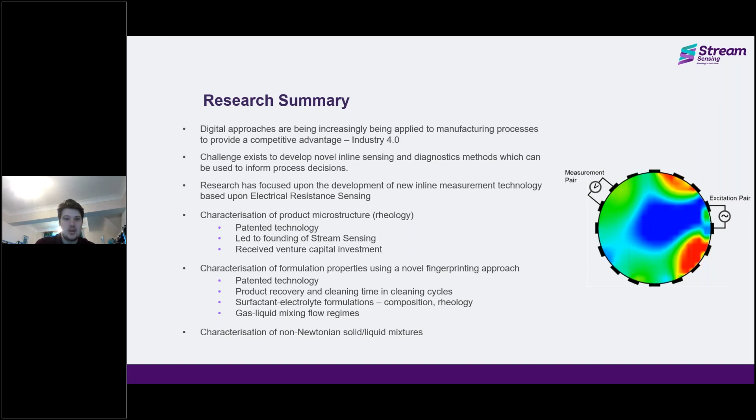Also developed a novel fingerprinting methodology to fingerprint different formulations. That's also patented, and that's been applied in a number of operations. So been looking at the product recovery and cleaning time and cleaning cycles, different compositions and rheology of surfactant electrolyte formulations, and gas liquid mixing flow regimes. Also looking at the characterization of non-Newtonian solid liquid mixtures in non-nuclear densitometry. For the sake of brevity, I'm going to focus on one application, so looking at rheology.

Rheology impacts every aspect of our daily lives, from the texture of the food to making sure that when you brush your teeth, you don't end up with toothpaste on your shoes. It's also critical in chemical and physical processes, governing your process efficiency and also the final product quality. Typically you would take a sample of your product at the end of a process, take it to the lab, analyze it, and then if it doesn't meet the quality control standards, potentially a batch would have to be scrapped or completely reworked. This obviously creates large volumes of waste and large amounts of energy consumption.

Using an inline approach and measuring the rheology in a pipe overcomes this, and it has a number of other advantages. It allows you to unlock production capacity, as it's a basis for real-time product release, improve quality control responsiveness, and also help enhance process design and understanding.

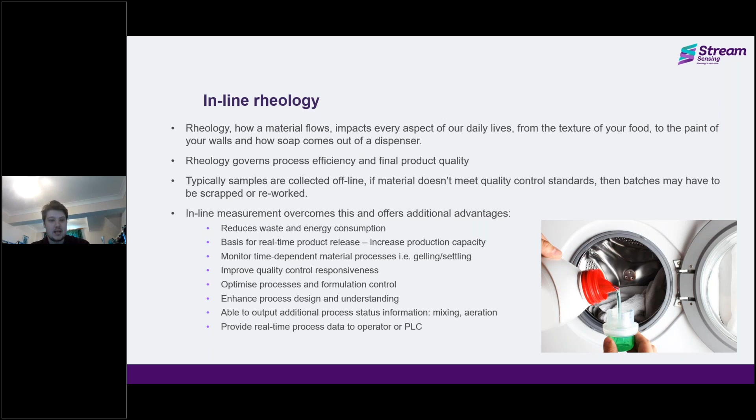So the technology which a lot of my work is based on is called electrical resistance sensing, or it can be tomography. Essentially the best way to think of that is it is a CT scan, but rather than using X-rays, you're using an electric field.

And we measure the rheology by tracing the motion of the fluid across multiple planes of imaging. So obviously we know the electrodes are fixed. We know how long it takes to get from one plane to the other. So then we can start to extract the laminar velocity profile.

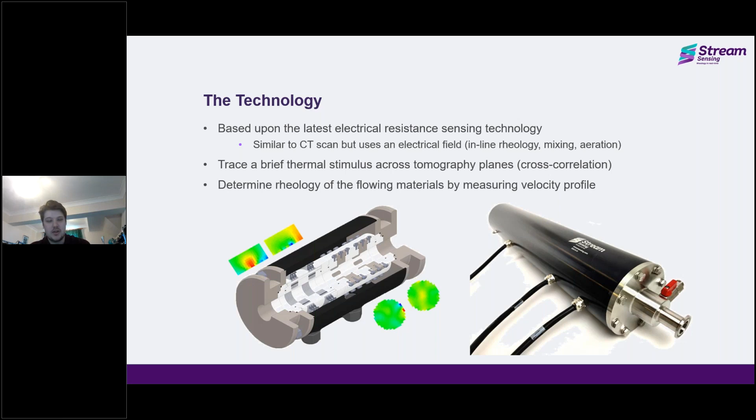And with this technology, we couple the velocity profile with the differential pressure measurement, and that can be used to extract viscosity at key quality control set points, and also output conventional rheometry plots such as shear stress, shear rate, which you get from a rheometer. As I mentioned before, you can also get mixing behavior at the same time, which makes it a powerful characterization tool.

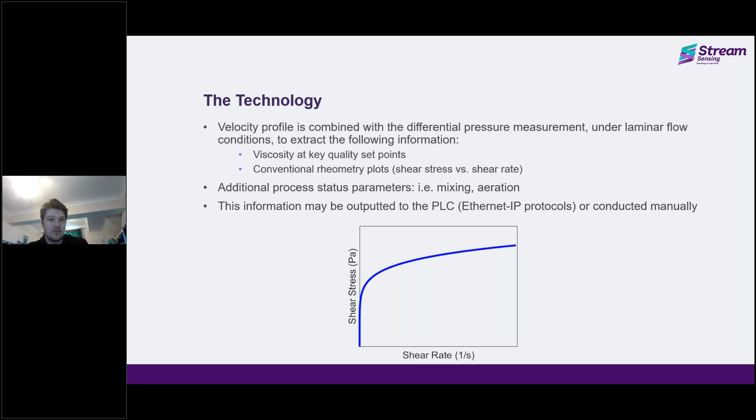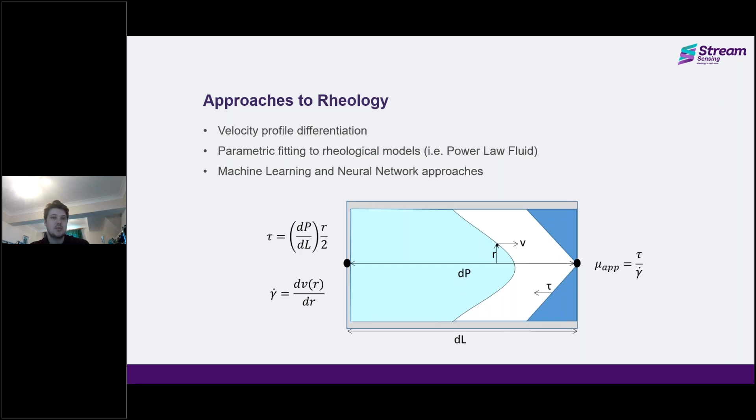So once you've got the velocity profile and the differential pressure measurement, there's a number of approaches we can take to get the rheology. We can differentiate the velocity profile. A favorite approach is a parametric fit into rheological models, so say a power law fluid. But often industrial fluids are a lot more complex than that. So you have one velocity profile trying to fit to say 5-6 parameters, and that makes it slightly ill-conditioned. So there's also another approach which we developed using machine learning and neural network approaches to extract rheology.

So how does the system perform? So the first thing we did was validate the velocity profiles we get from the technology, and this was done using particle image velocimetry, which is a laser-based technique which is of high resolution. However, obviously, if you're using lasers, it's not ideal in an industrial setting, and it's limited to transparent fluids. But what it was able to do is provide us confidence that the velocity profiles which we're measuring were accurate, as we got a high correlation coefficient of 0.99.

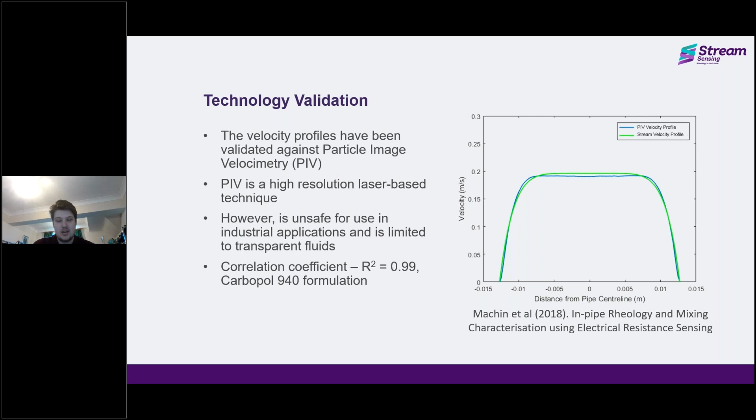I guess the ultimate test is to validate the technology against an offline rheometer. So within a flow loop, we had a 1-inch flow loop and a 1-inch sensor. And basically, we picked fluids such as glycerol, xanthan gum, carbopol, which have a limited time shear dependency. So if you're taking a measurement in a pipe, it should be relatively similar to what you're taking offline. And this was used to validate the technology against a rheometer. And what we found is the approach that I developed was able to accurately monitor inline rheology with an accuracy of 98%, which is really positive.

This is just a separate experiment to show how the two can be linked. This was done in a similar flow loop, but it was recirculating. This was started off with a very low concentration xanthan gum solution. To that, we added a really high concentration of xanthan gum, so it was mixing over a period of time. And what we were able to monitor was the evolution of rheology over time by the rheology measurements, and also measure the distribution of the electrical properties within the sensor, so we can start to see when the process is mixed and when the process isn't mixed. So you can do things like coefficient of variance measurements at the same time. So it then becomes a really powerful characterization tool.

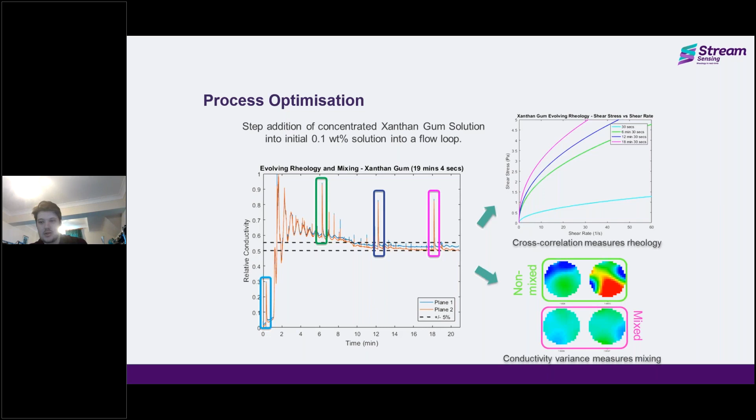So this was another approach we used. The aim of this was to replicate a quality control process for rheology. This was done at a manufacturer of home and personal care products using industrial fluids. People tend to measure viscosity at key control set points. So we picked a viscosity at a certain shear rate, and then looked to see if we were able to match this using our system. And what we were able to do was gain an accuracy of plus or minus 5%, which is great. And then this can be used for unlocking process capacity, optimizing batch time release, and also automating quality control principles.

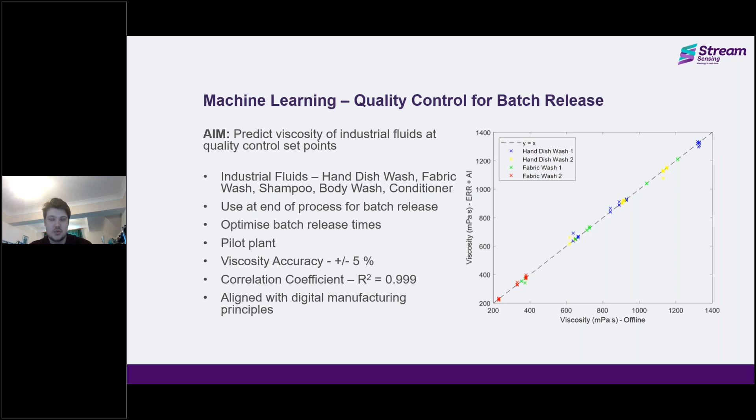So just a brief summary of my work. I developed new inline sensing and diagnostic tools to characterize complex industrial fluids, focused on inline rheology, which obviously has a number of measurement advantages, which I talked about. I also developed two more techniques, which I haven't had a chance to really touch on, looking at fingerprinting of fluids and characterizing non-Newtonian fluids, and non-nuclear density measurements. So if anyone wants to talk to me about that after, it'd be great.

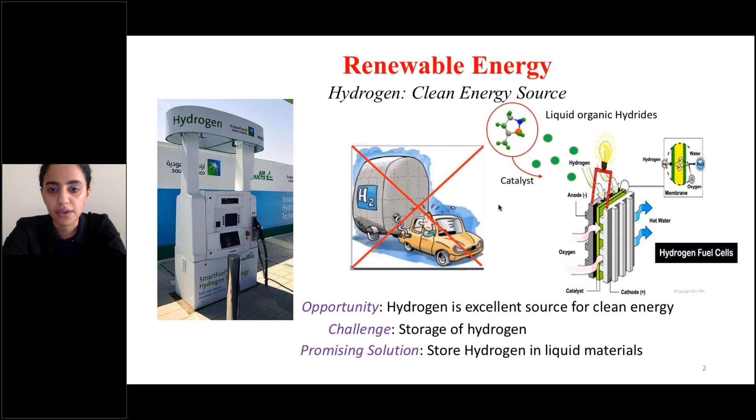As we all know, hydrogen can be an excellent source to produce energy. However, the storage of hydrogen is problematic. So the promising solution here is to store it in the bonds of methyl cycloalkanes and cycloalkanes. However, this reaction is endothermic and requires a catalyst. The best catalyst for this reaction is platinum. It's quite expensive, but it's the best to lead to the main reaction that produces hydrogen and prevent the side reaction that leads to the cracking of the carbon-carbon bond.

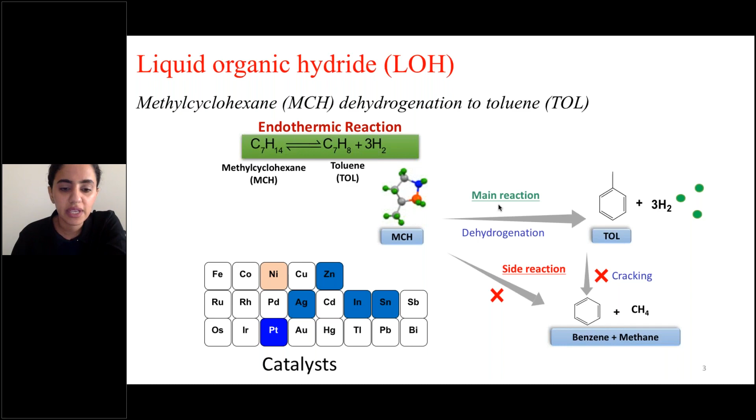Looking into different elements that can replace platinum, nickel has emerged as a potential replacement, along with other elements, and also metal alloys in the form of nickel-zinc. So our contribution to this was to look into the intrinsic difference between platinum and nickel in the full dehydrogenation cycle when methyl cyclohexane, for example, is converted into toluene.

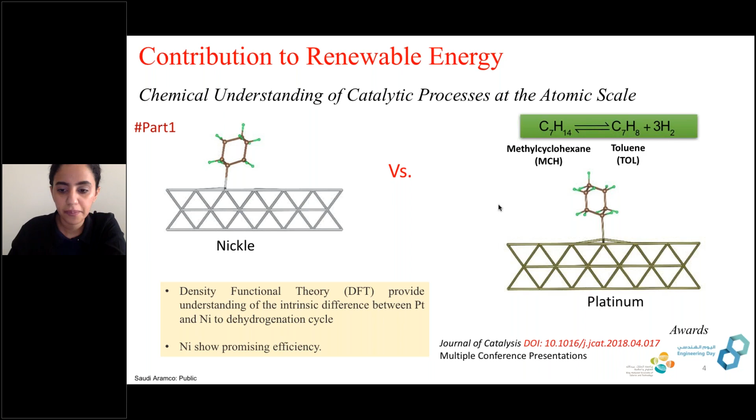We looked into the cracking of the carbon-hydrogen bond over those metallic surfaces, flat surfaces actually, (100), using DFT calculations. We provided different insights into the full thermodynamic cycles and the energy required for each step. And we saw that nickel provides promising efficiency for this process with a certain degree of energy efficiency. We also looked into the chemical insights that could take place at those flat surfaces.

In particular, if we look into the methyl substituent in methyl cyclohexane, we can see that the cracking of the carbon-hydrogen bond from the methyl group is an exothermic process that leads to the stability of this species and leads to the sticking of the parent molecule onto the surface, and enhanced stability due to the chemical changes that take place at the methyl substituent, leading to the transformation from sp3 hybridization into sp2 hybridization, which provides extra stability to the parent molecule at the interface.

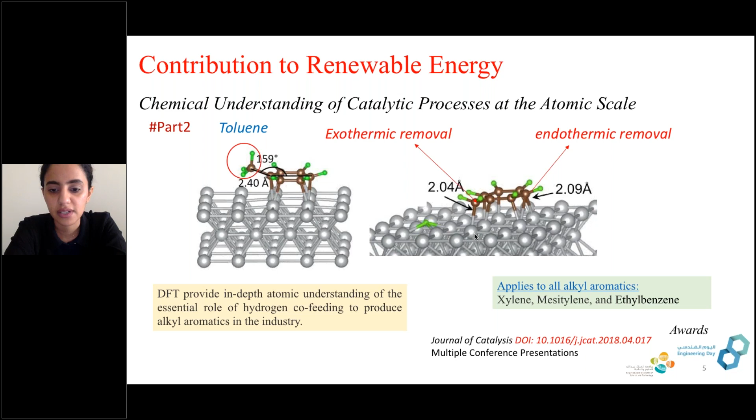We saw that this can be extended to parent molecules with different alkyl substituents, as well as long branches of alkyl substituents such as xylene, mesitylene and ethyl benzene. And this actually provides in-depth atomic understanding of the essential role of hydrogen co-feeding to produce alkyl aromatics in industrial applications.

The second part of my research, which took place during my work in Saudi Aramco, is in the area of enhanced oil recovery. In this area, we looked into the opportunity of smart water flooding to enhance oil recovery in tertiary processes. It's more or less better than other enhanced oil recovery processes like chemical or thermal processes. It's less energy intensive and has less environmental impact.

It requires changing the chemical composition of the water, either by reducing the salinity, altering the concentration of divalent cations, or increasing the concentration of different anions. However, this process is not quite understood in terms of the mechanisms that lead to its success, and further fundamental understanding is required, especially at the atomic scale and the nano and micro scale.

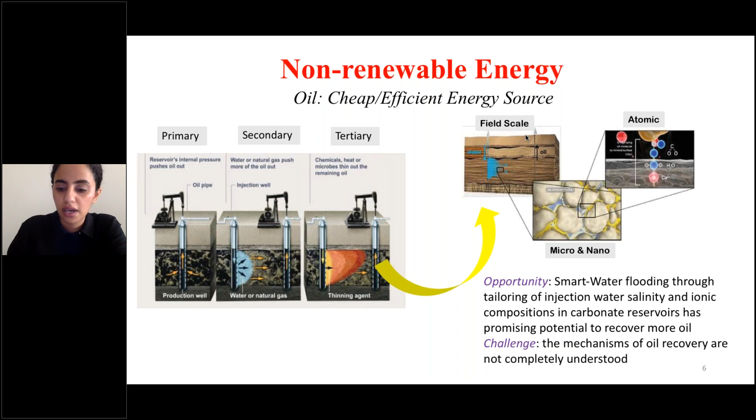So our contribution in this was the understanding of the physicochemical interactions that take place at the interfaces of this very complex system of oil, water, and rock surfaces, especially carbonates, since most of the reservoirs in Saudi are carbonates.

So we looked into the electrokinetic interactions that take place at the oil-brine interface as well as the calcite-brine interface. We found that the electrical potential at those two interfaces differs drastically when you change the composition of the water, either when you reduce it, as in the case of smart water, or when you choose certain ions like sodium sulfate water. We found that at the calcite-water interface, the potential reduces in the case of smart water, which is very promising in our case.

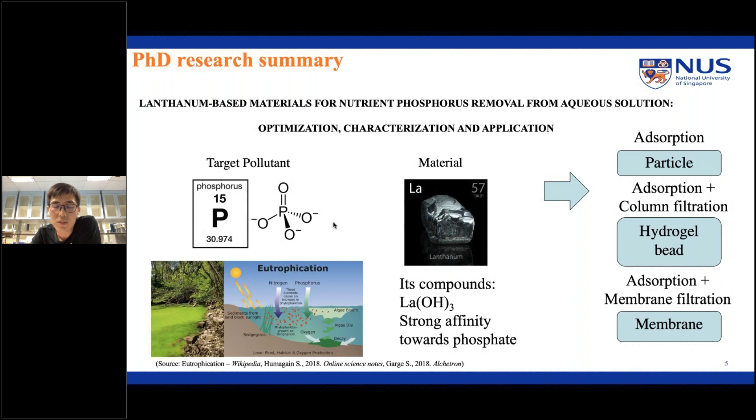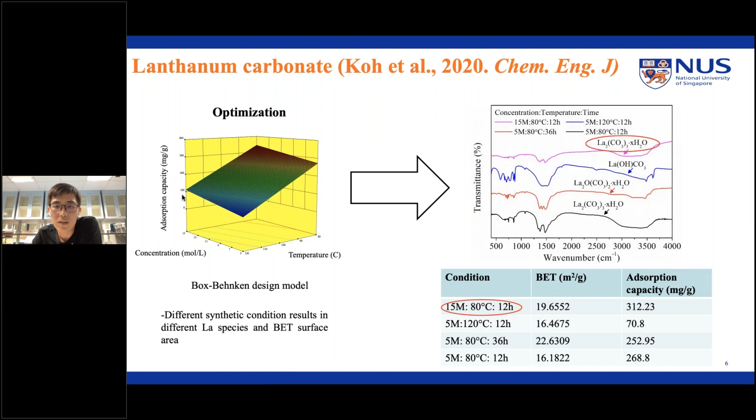So this is the first part of my PhD research, using lanthanum carbonate particles. Firstly, the particle was optimized using a Box-Behnken design model in order to obtain the best conditions for the synthesis of lanthanum carbonate with the highest adsorption capacity. We can see that a higher concentration of urea, lower temperature and time result in the highest adsorption capacity.

As shown, this material has good performance for phosphate removal across the pH range, and it shows consistent performance even in complex wastewater. Other than that, it can also be regenerated and reused for subsequent adsorption processes.

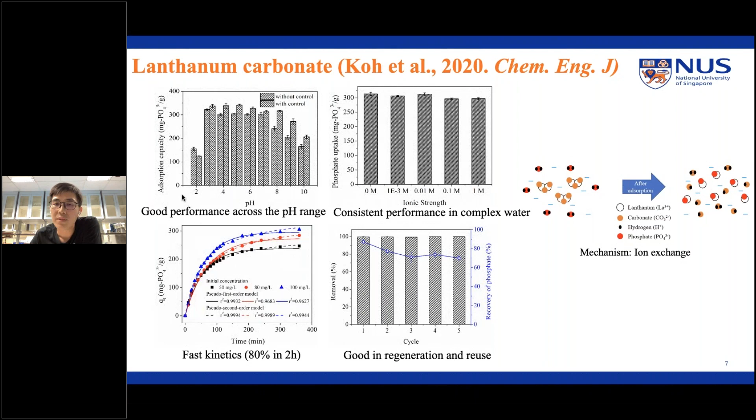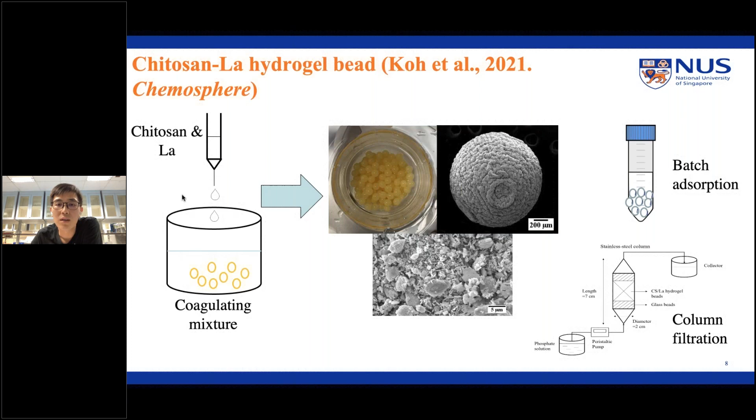So the next step is to incorporate lanthanum into chitosan hydrogel beads. By doing that, we are able to recollect the hydrogel beads easily from the water for subsequent reuse. The hydrogel beads were optimized by varying the La concentration and the cross-linker degree. It shows that the optimized hydrogel beads with smaller size can achieve better kinetics, comparable to the particles in the previous stage. Other than that, because it has been formed into a bead shape, it can be used in a column filtration process.

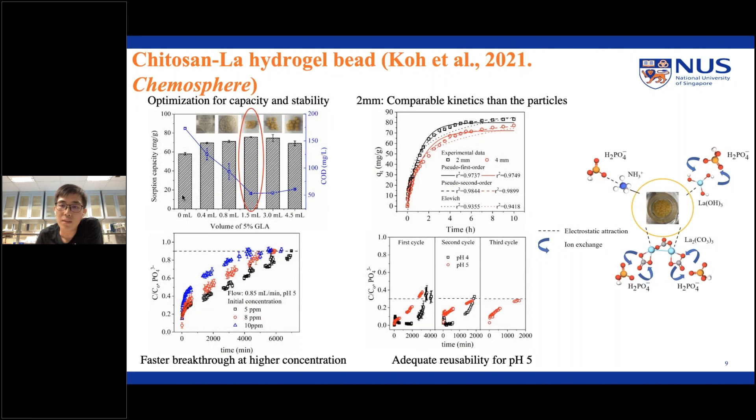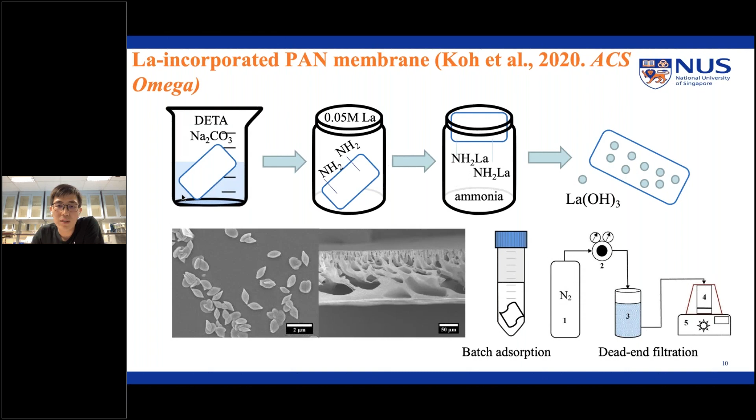So next is incorporating the La into a PAN membrane. By doing this, it's also to achieve the similar purpose, to make the recollection process easier, and also this membrane can be applied in the dead-end filtration process. It shows that the incorporation of lanthanum reduced the porosity and the pure water flux. We can see that in the filtration process, it can remove the phosphate pretty well, and it can be reused and also used in the reservoir water.

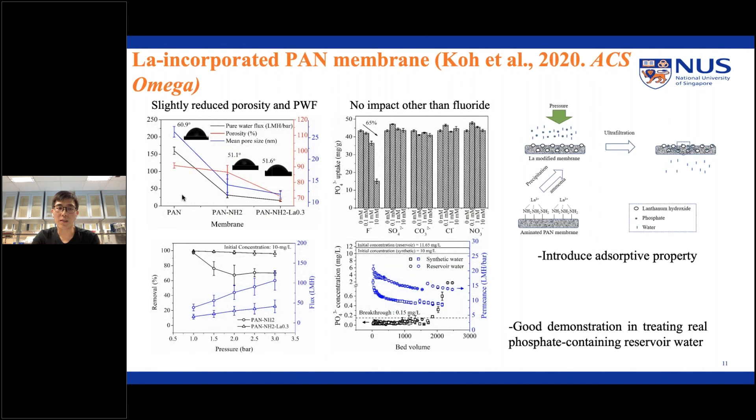By introducing the La into the membrane, it introduced the adsorptive properties, and at the same time, you are able to remove other pollutants such as organic components. Next, I optimized the incorporation methods for incorporating La into the PES membrane. By doing the comparison, we are able to obtain the best method for the incorporation of La.

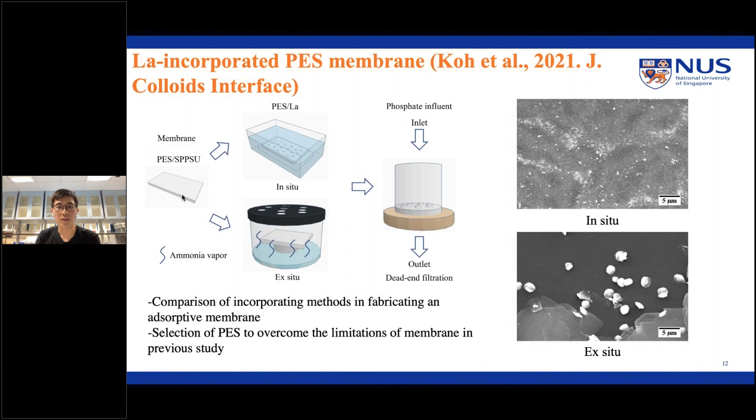We see that the different methods resulted in different La species on the membrane. Overall, by studying their performance, we can say that the in situ method resulted in a membrane with better performance in both batch adsorption and membrane filtration process. Other than that, this membrane is able to show comparable phosphate removal when we compare it with the nanofiltration membrane.

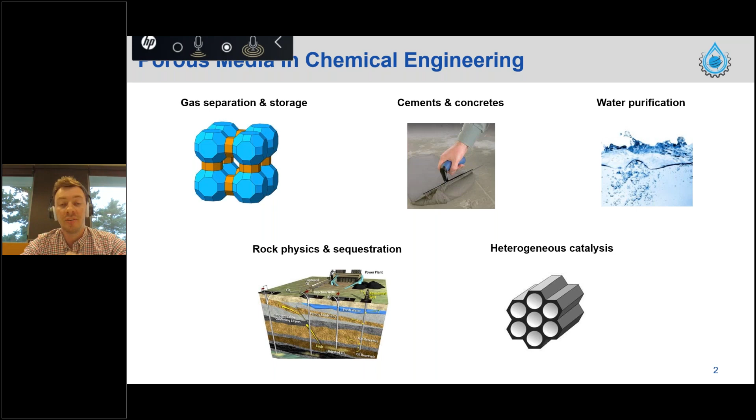A non-exhaustive list of porous materials for these sorts of applications is provided here and ranges from bespoke, well-characterized and well-defined systems such as zeolites for gas separation and storage, and porous systems for heterogeneous catalysis, across to more heterogeneous systems, including cements and concretes, and also naturally forming systems that we might be interested in for geosequestration.

The primary workhorse of my research is magnetic resonance, and I don't want to go into a huge amount of theory, but by magnetic resonance, I mean nuclear magnetic resonance, typically abbreviated to NMR. NMR leverages the inherent magnetism of many atomic nuclei and the fact that we can use the application of magnetic fields and radio frequency pulses to control that magnetism in order to generate some sort of signal.

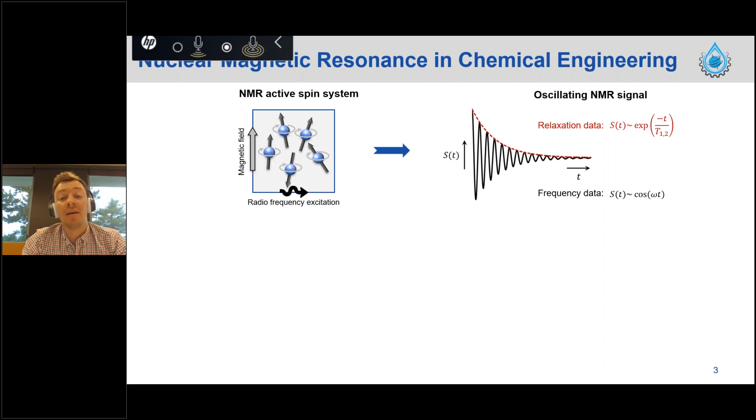The signal that we typically get out of an NMR experiment is an oscillating signal. An example is shown here, and you can see it oscillates and decays in time. This signal form characterizes the system under investigation quite well. In a chemistry or biochemistry research lab, the interpretation of this kind of data is typically done by looking at the frequency data, using Fourier transformation to take this data into a frequency spectrum.

It's well known that the frequency behavior of NMR data is sensitive to the electronic environment of the molecules or the solids that you are analyzing, so it's a very well-established probe of molecular structure. In the case of understanding fluid behavior, and by fluid I mean gas or liquid or a combination, in porous materials, however, this process is usually not quite as useful.

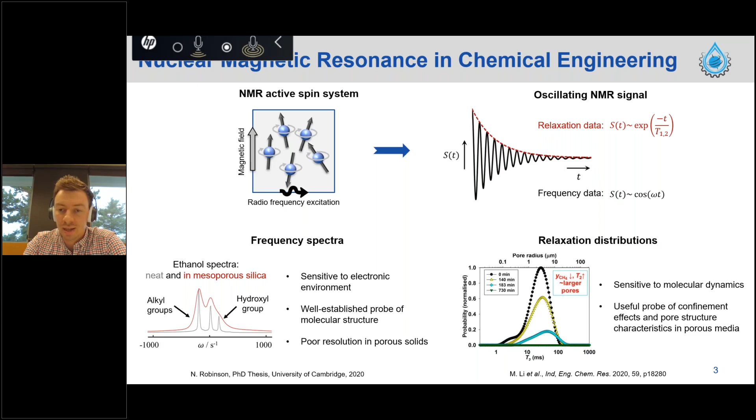So while frequency data is sensitive to structure, relaxation is sensitive to dynamics. And this is a particularly useful probe of porous materials and of fluid behavior within porous materials. And it's this behavior that I leverage in my research. So there's an awful lot of relaxation theory, which I won't go into at all today.

I think this is a really fascinating bit of chemical engineering science. What I'm going to show you today is just a quick example of using relaxation data to look at both of those phenomena. So how can we use relaxation data to test out essentially material structure, and then how can we also look at interfacial processes?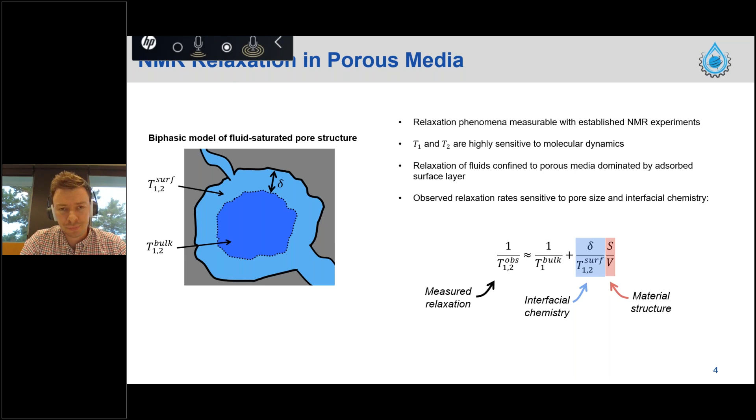Because they use permanent magnets rather than cryogenic liquids, there's no cryogens to deal with, so you don't have the safety or cost concerns of constantly replenishing liquid nitrogen and liquid helium, which are present within the superconducting system. And so that has, as I said, a large reduction in cost and safety. It also means that these low field benchtop systems are pretty much maintenance free.

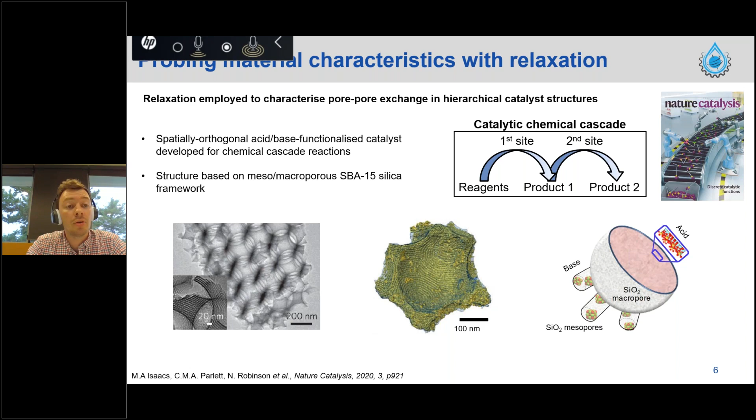So this material is based on templated mesoporous silica, but it also has integrated macropores, and the macropores and mesopores will functionalize differently so that one pore size will catalyze the first reaction and one pore size will catalyze the second reaction. Critical to the validation of this material, however, was knowledge of the route which fluids take from the external bulk into the material. Do they go bulk, macropore, mesopore, or do they go bulk, mesopore, macropore? And so last year I utilized magnetic resonance in the form of quite a complex 2D correlation set of experiments to actually probe this. So this is actually the only known experimental route to this behavior.

And so by varying the mixing time, we were able to probe diffusive exchange throughout this structure across a variety of length scales. And we were able to show that there was clear connectivity between the mesopores and the macropores. And more importantly, we were able to show that there was clearly a well-defined diffusive pathway that went from the bulk to the macropores to the mesopores. And so this knowledge informed the location upon which the different active sites needed to be placed during material synthesis.

The second example I'm going to show you is to do with adsorption. So looking at the surface affinity of liquids within catalyst materials is critical in, for example, solvated green chemical processes, where you don't want your solvent to outcompete with your reagent for the surface. So the ability to rapidly and non-invasively characterize the surface affinities of liquids within different porous catalyst materials is critical.

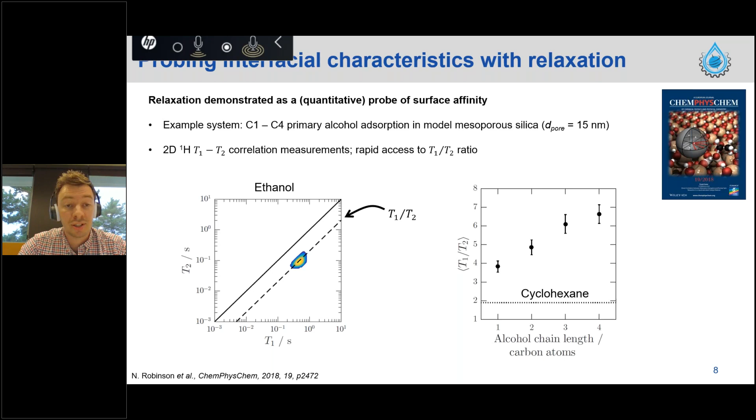And so in this work, we looked at a series of C1 to C4 primary alcohols, so methanol through to butanol, interacting with a model silica surface, and we recorded the T1/T2 ratios, also cyclohexane as a non-interacting reference. And then we compared that with adsorption modeling. So using periodic DFT, we calculated the adsorption energetics at the single molecular level, and then provided a direct comparison between the NMR acquired relaxation surface affinity data and the DFT molecular modeling acquired adsorption energetics.

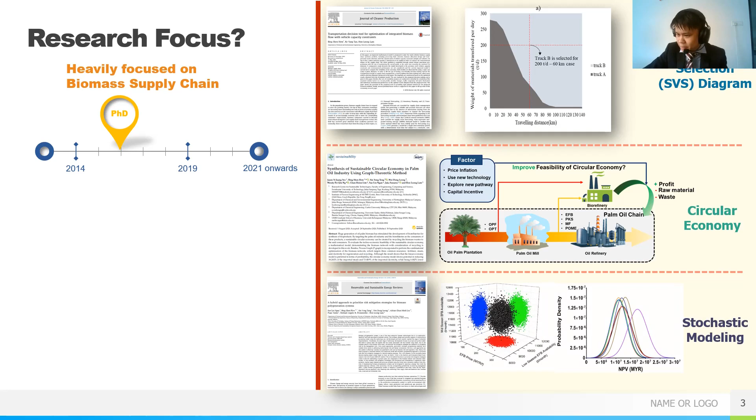Speaking of policy, among so many policies, which policies should be prioritized? My team attempts to answer this research question using Monte Carlo simulation, which considers various uncertainties such as biomass availability, biomass quality, and unit price of the material. Nevertheless, after I graduated, I started to explore more areas outside my comfort zone. I believe that all the skills I learned during my PhD studies are transferable to other fields of research. So why not expand my contribution to a wider area?

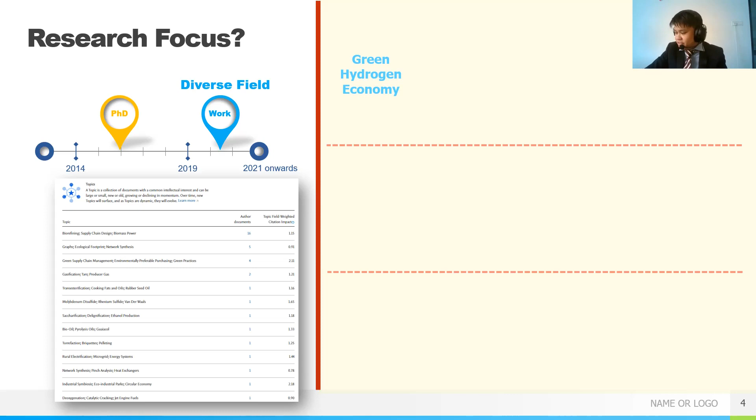The green hydrogen economy has been a hot topic in recent decades. I'm delighted to work with a research team at Kyung Hee University to study the optimal hydrogen production technology in Korea. Furthermore, in the Malaysian context, the biogas generated from palm oil mills serves as a feasible feedstock for hydrogen generation. To assess the feasibility of this pathway, I work with a research team from the University of Nottingham to determine the optimal pipeline design, which can be used to transfer biogas to the dedicated hydrogen production plant.

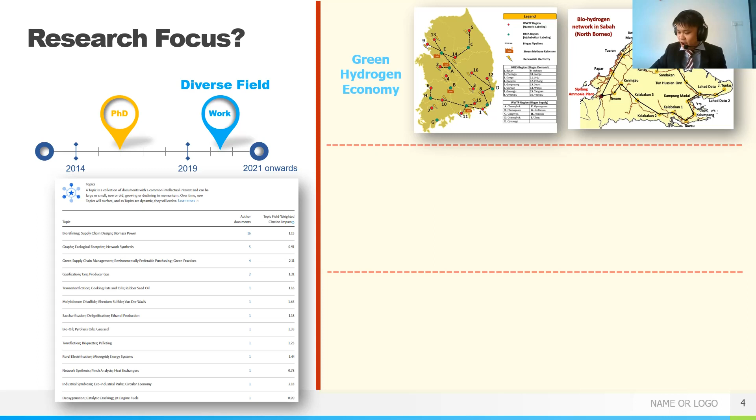Next, lean and green aspects are important indicators to be considered in process debottlenecking and upscaling. In one of my projects, my team developed a tool called BOTA to assist decision makers in prioritizing the upgrading sequence of process equipment. Just a side note, this also presents the impact of using different upgrading schemes. For example, if one decides to upgrade all equipment in one go, the payback period required may be longer than that of a progressive upgrading scheme.

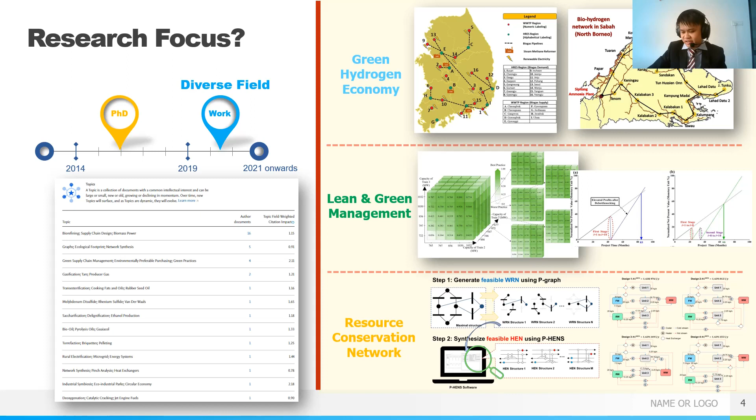More recently, I have started a few projects related to energy planning and resource conservation networks. One of them focuses on determining the heat-integrated water network, which aims to minimize both fresh water and energy requirements. We propose to solve the problem using P-graph since it is capable of yielding multiple near-optimal solutions simultaneously. With the identification of alternative solutions, decision makers can then perform a more in-depth comparison and select the one that is most suitable for their specific case. Transforming the findings into reality is always the most important mission for a researcher.

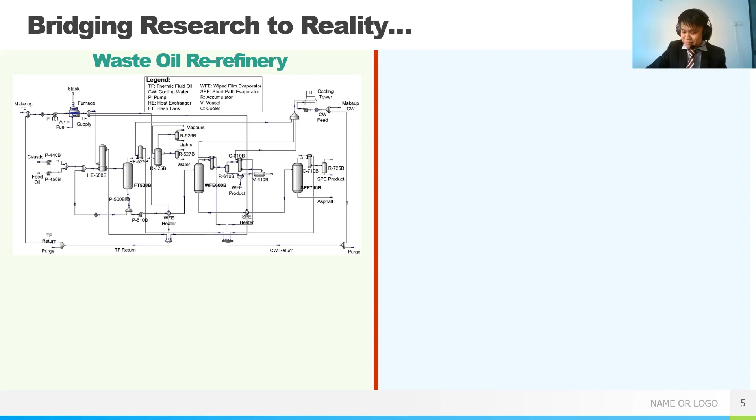Just for sharing, in one of my earlier projects, we were looking to optimize the performance of a real waste oil re-refinery plant in Malaysia. However, given that there is a gigantic amount of process variables to be considered in the plant, the optimization process can be very arduous when using the conventional method. To address this problem, the team came up with a novel optimization method called PASPO, which incorporates the use of PCA to effectively reduce the dimensionality of the problem while ensuring the reliability of the outcome.

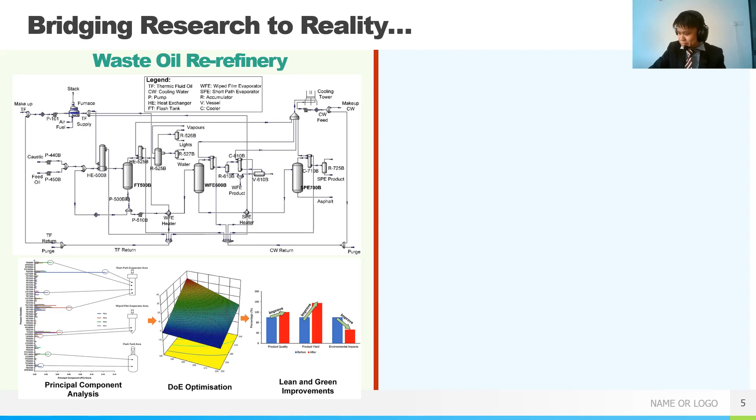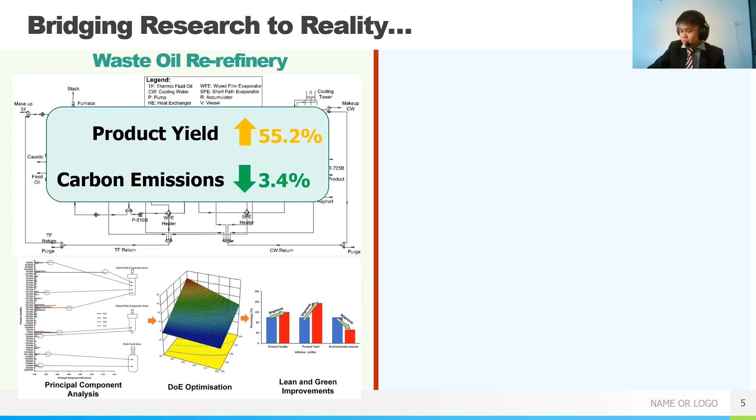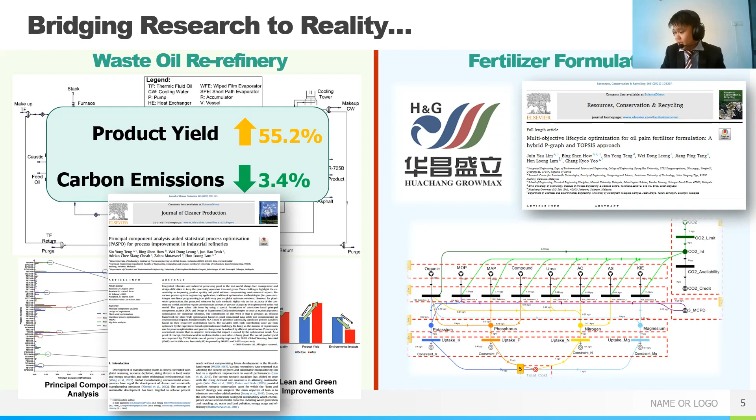Based on the pilot testing in the plant, after adopting the improved scheme suggested by the model, the product yield and the overall carbon emissions of the plant have been improved gradually as shown in the slides here. You can find out more in this paper if you are interested. During my industrial attachment in Huachang Growmax, I was asked to determine the optimal oil palm fertilizer formulation. Again, with the aid of the P-graph approach, I managed to come up with a few attractive fertilizer formulations for the company. All the findings have been documented in the journal article shown here.

Moving on to the grant application, I have secured grants from all three dimensions shown here. In terms of industrial collaboration, I've led a team in discovering the economic feasibility of building a green hydrogen plant in Kuching, Malaysia. The research served as an important guide for SEDC Energy in identifying the potential gaps prior to the actual deployment of the plant. Last year, we secured a state fund which aimed to foster research that supports green economy and sustainable development in the Sarawak state. In this project, we aim to convert the waste carbon dioxide, the cement waste, and the unwanted fly ash into usable green building material using the absorption and AWL technology.

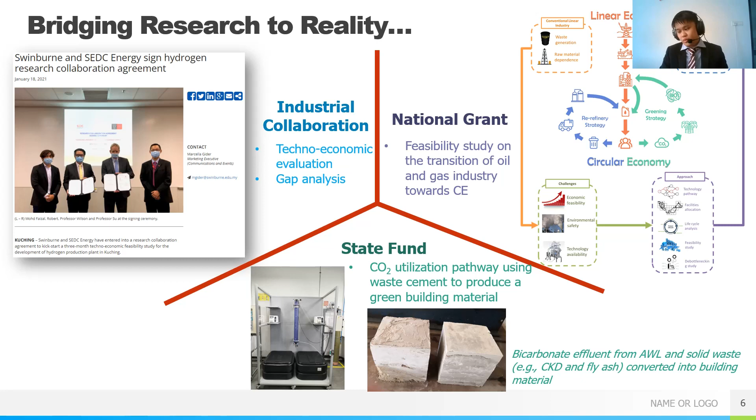Furthermore, my team also secured a few national grants. For example, one of them aimed to explore the feasibility of transitioning the conventional oil and gas industry into a circular business model. Generally, we consider two main strategies. The first focuses on the re-refining option for the waste oil, while the latter focuses on replacing the fossil feedstock with biomass feedstock. From my understanding, research is meaningless unless the knowledge is transferred.

Before I end my presentation, I would like to share a belief of mine regarding young researchers. Young is never a constraint, it's a field for us to explore further without fear. That's all for today. Hope you enjoyed the session.